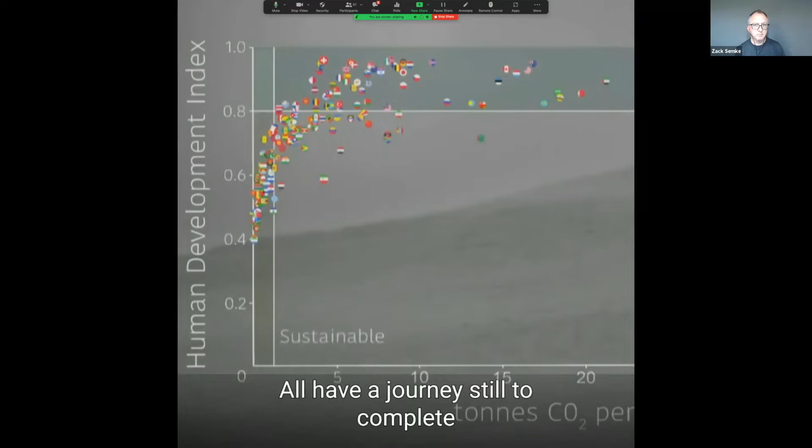A new industrial revolution, powered by millions of sustainable innovations, is essential and is indeed already beginning. We will all share in the benefits: affordable clean energy, healthy air, and enough food to sustain us all. Nature is a key ally. Wherever we restore the wild, it will recapture carbon and help us bring back balance to our planet. And as we work to build a better world, we must acknowledge no nation has completed its development, because no advanced nation is yet sustainable. All have a journey still to complete, so that all nations have a good standard of living and a modest footprint. We're going to have to learn together how to achieve this, ensuring none are left behind. We must use this opportunity to create a more equal world, and our motivation should not be fear, but hope.

Can we fix the climate problem in one generation? My answer would be yes, we have to. We need to not just talk about what we can do, but to do what we can. This is a challenge that we should try to solve in a quick way with a long-term vision. It comes down to this: the people alive now and the generation to come will look at this conference and consider one thing: did that number stop rising and start to drop as a result of commitments made here? There's every reason to believe that the answer can be yes. If working apart we are powerful enough to destabilize our planet, surely working together we are powerful enough to save it. In my lifetime, I've witnessed a terrible decline. In yours, you could and should witness a wonderful recovery. That desperate hope, ladies and gentlemen, delegates, excellency, is why the world is looking to you and why you are here. Thank you.

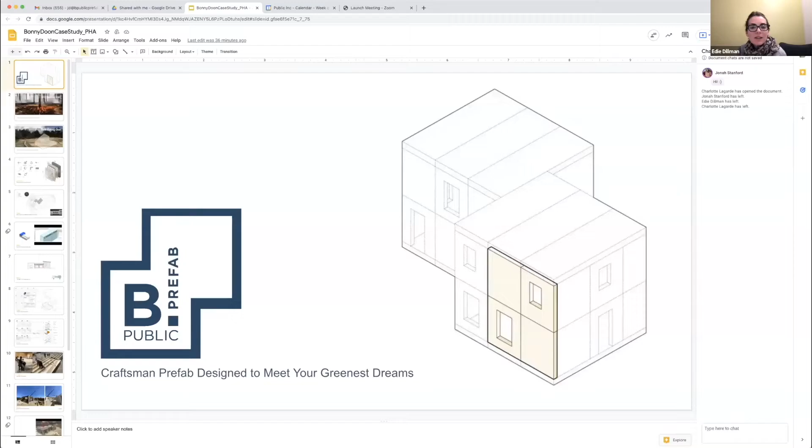There we go. So we're just really delighted to share this and excited for the Q&A. It's always great to have a conversation about this, and we'd love to jump in. So JD, you can take it away and share your screen. Great, looks great, everyone can see. All right, I'll just pause it here for a second. We have this lovely GIF that scrolls through, so we can all get mesmerized by this for a second.

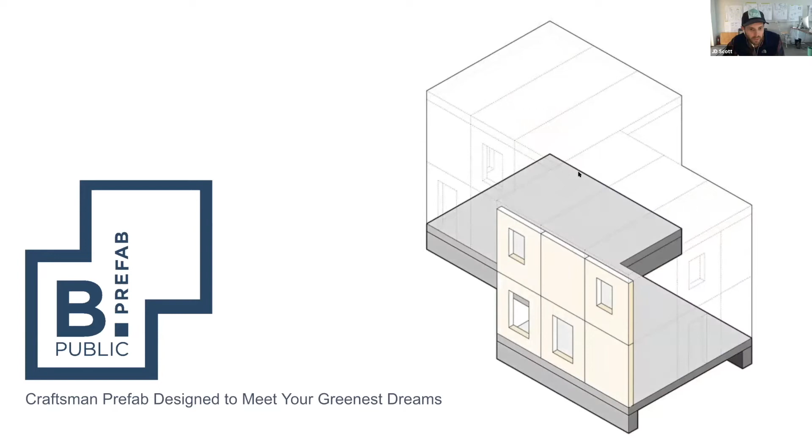Thanks for the introduction, Edie. Just to give you some context on the project and the background.

This is a rebuild from the CZU fire, which was a major wildfire event back in 2020 in Northern California. Santa Cruz County was really the hardest hit in that event, losing nearly 1,000 single-family homes in the fire.

Our client had lost their home in the event and were really excited to return and rebuild. But this was a really traumatic event for this community, and that's something we all experienced when we were on the ground there in September.

Santa Cruz County has really rigorous pre-clearance requirements for these rebuilds, and so that was on the front end. Our client really had to do a lot of work to even be eligible to do this.

Jonah is going to give an overview of the B.Public system and its attributes too. Thanks, JD. JD's been so much fun to work with on this. Just a note quickly.

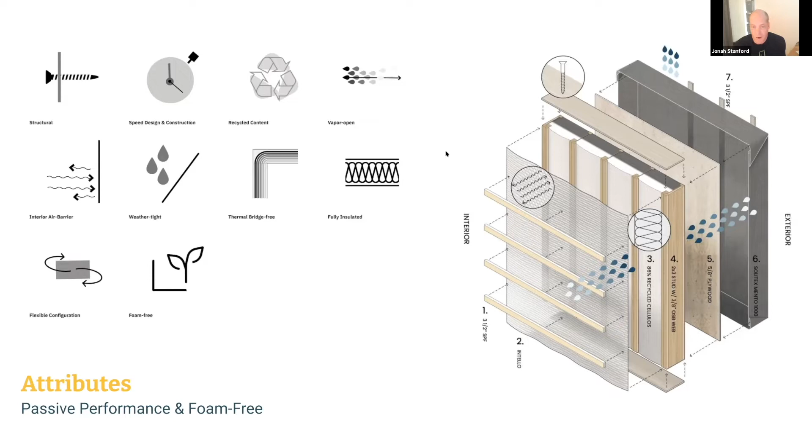The B.Public components, I think maybe most people are familiar with them here, but they are primarily carbon sequestering. They are thermally bridge free, even all their connections. And so it was really great to see JD take on this project with the components and see how they did from a structural and a seismic perspective.

Because really our focus has been to see if we can take those best practices and generate something that was really resilient in terms of its climate, its seismic or structural loads that are always defined per project, and see if it would work within these really diverse situations. So it was a really great project in that way. And I'll just give it back to JD for process there.

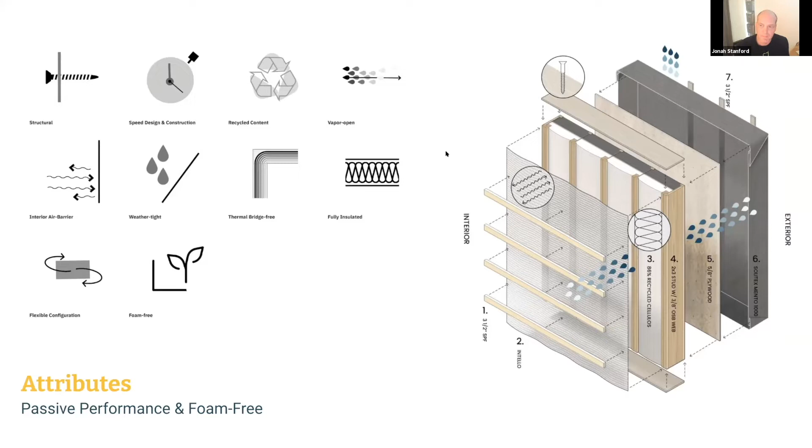We'll have lots of time afterwards for questions to get into more technical detail if people want. Absolutely.

So yeah, moving more into the design process, B.Public, the way we structure our project phases is we start with a site evaluation, site sketch phase, and we also provide a preliminary 3D model at that phase using the components that Jonah just outlined. It's really just to give a client that first vision of what could be done on a site. So in this case, we're showing that dash line where the original building was, and then locating the new house on the site.

Particularly important now for these rebuild projects is having a pretty beefy fire suppression system, so you'll notice the tanks we've located on the site plan. We also look at other site elements they might want to incorporate, like a garden. This project was oriented for a PV array, but it's also on this wonderful axis with a view towards the Pacific Ocean that you can see on clear days.

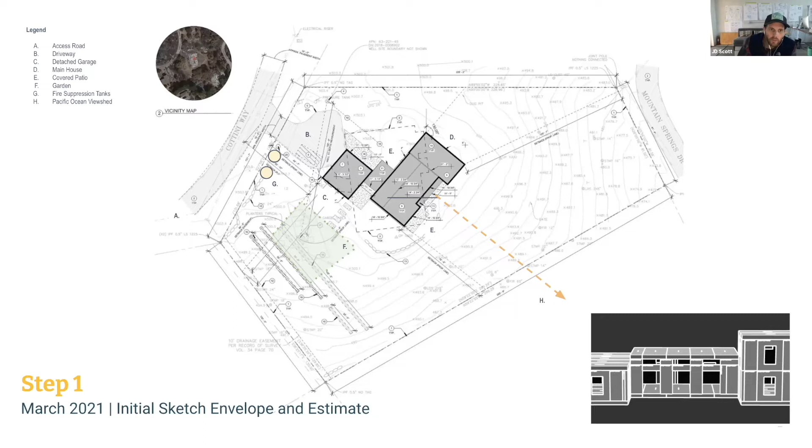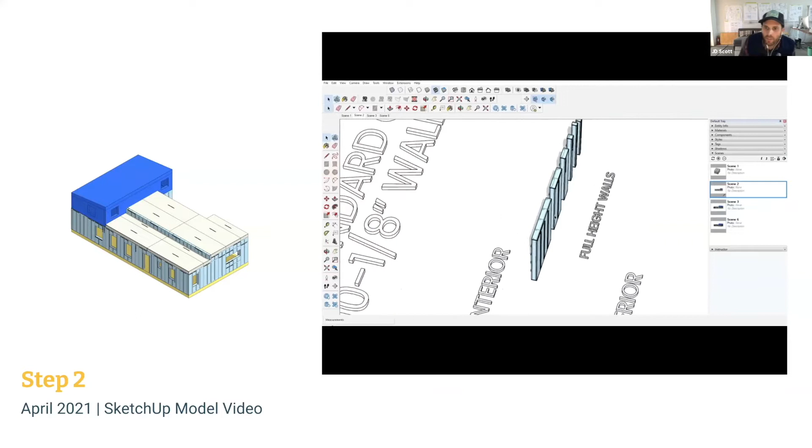The second half of this phase is generating this component model, using our standard panel components which we have in SketchUp. They're available for download for free, so anyone on this call could download these and experiment with them. It's a really intuitive way to design and create a thermal envelope quickly.

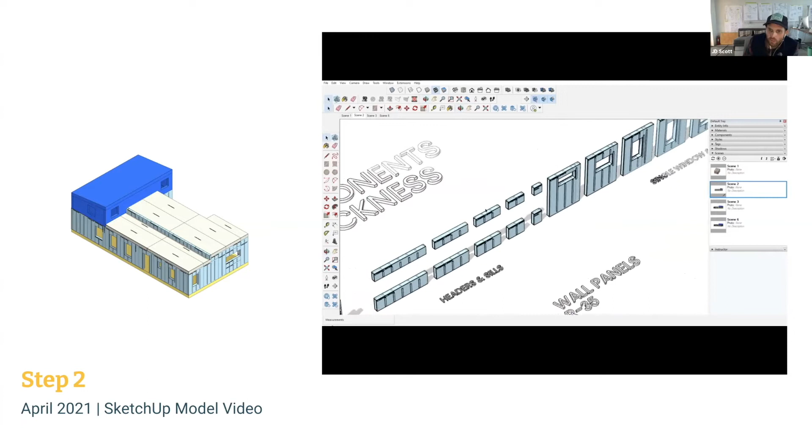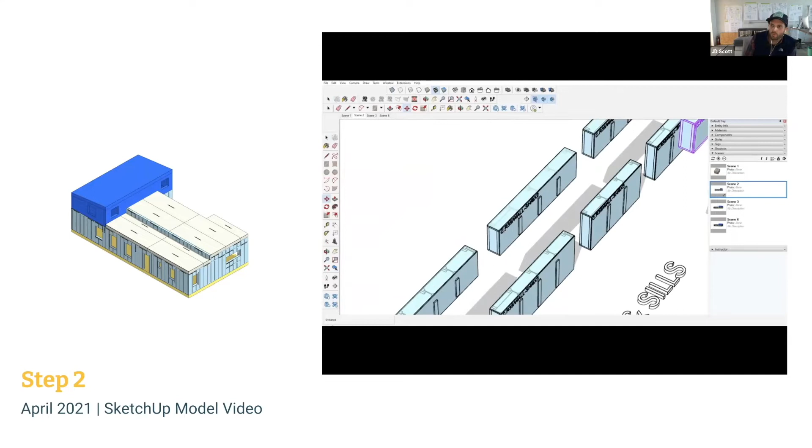This newest generation of SketchUp components are true to life, so they have all the information that our shop drawings would have for the panels. You can see all the structural framing and the interior and exterior furring strips. It gives the client a ton of detailed information up front that, in a normal architectural process, you wouldn't encounter until DD, sometimes later. Accompanying this, we give the client a detailed panel estimate, so they have options up front if they want to look into financing or talk with a builder. They have a lot of leverage coming out of this first phase, just from this panel model.

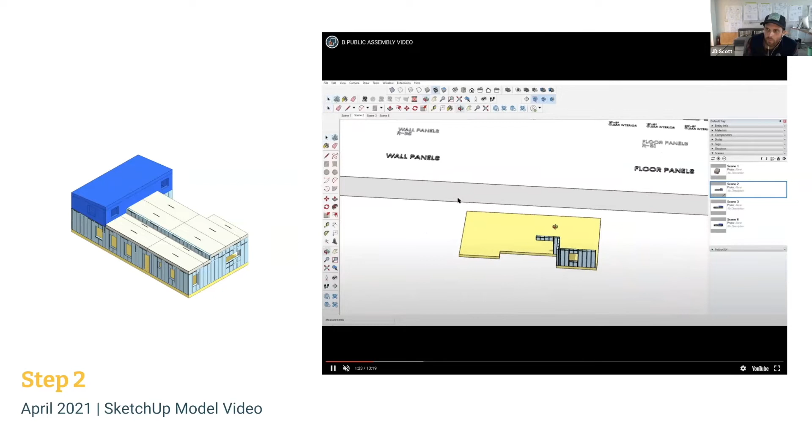Jonah, I don't know if you had anything to add on this. No, I think we can probably go on to the other slide.

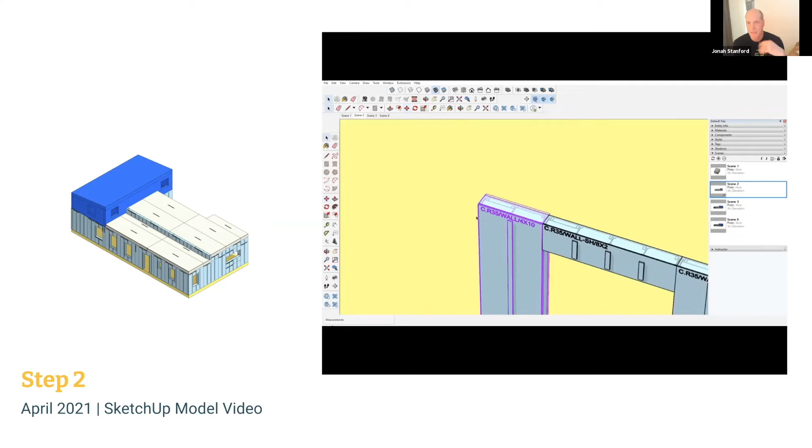During that site plan design, the model building happens really side by side, so that the client has a good estimate for that total thermal envelope construction cost. One thing that JD and I pay attention to is that once you've got your performance nailed down and the cost of it, it's around 35% of your total construction costs, where the remainder is really a tool in terms of finishes and amenities that a project can modulate its budget to. So it's really nice to have that level of cost estimate for the thermal envelope at this point.

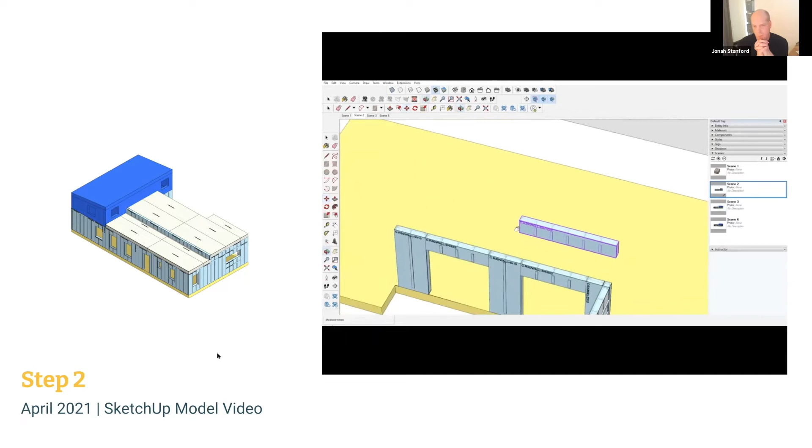Moving into our next phase, we get more into the architectural expression of the project. In this case, we're giving the client different fire-resistant finish options. That being said, we really try to leave these decisions to the client and builder, because our primary focus is really on the system performance and critical items like the panelized assembly, windows and doors, the ventilation system, ERV system. In our builder set, our construction documents, we develop those critical items in an extremely rigorous, detailed way. But we let the fun decision-making fall onto the client and builder, which opens up some more flexibility for our clients.

A lot of these are done on an iPad. This combination of the aesthetic being defined on an iPad and traced really light, and then the 3D modeling, happens before it goes to a BIM or construction documents. So you have really accurate passive house detailing, like building science and thermal bridge understanding, plus a fun sketch of what it's going to look like on the outside. It's kind of cool that it really works from both sides.

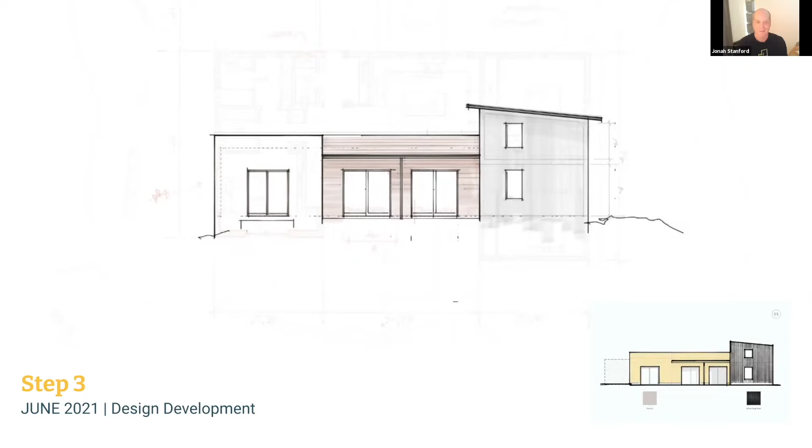So then we move into developing the construction set. One of the ways we're really streamlining this is by developing a standard library of our details - our panel connection details, and also site-built details. These are vetted ahead of time, and we're able to run them by the engineer of record and develop them on a project by project basis.

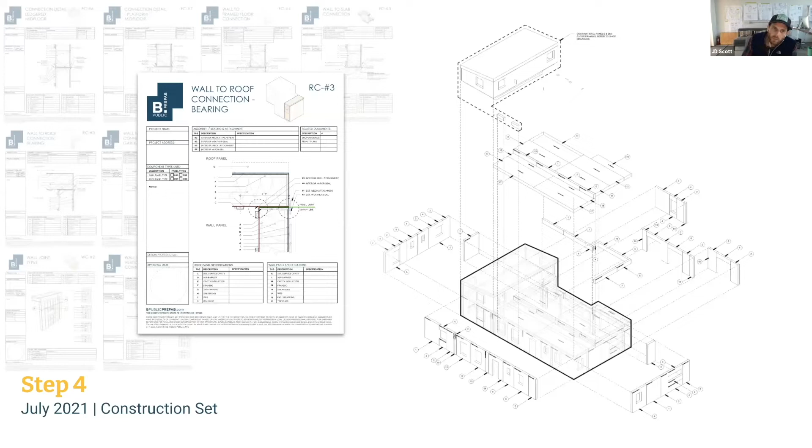At the same time, we're thinking ahead towards the actual panel install. This image on the right was included in the construction document set as an aid to our install crew, when they were on the ground installing the project.

I think it helps more as we're partnering with other architects where we're not the architect of record. It helps communicate to them how that scope is divided up and what those responsibilities are. For those lucky enough to work on full modular or multiple family projects, this becomes less critical because coordination happens in-house. But B.Public is really working to serve smaller or more rural projects that don't have access to full modular construction at that scale, so we're working on ways to clearly integrate with local architects and builders, serving smaller projects just as efficiently as larger multi-family projects using offsite construction.

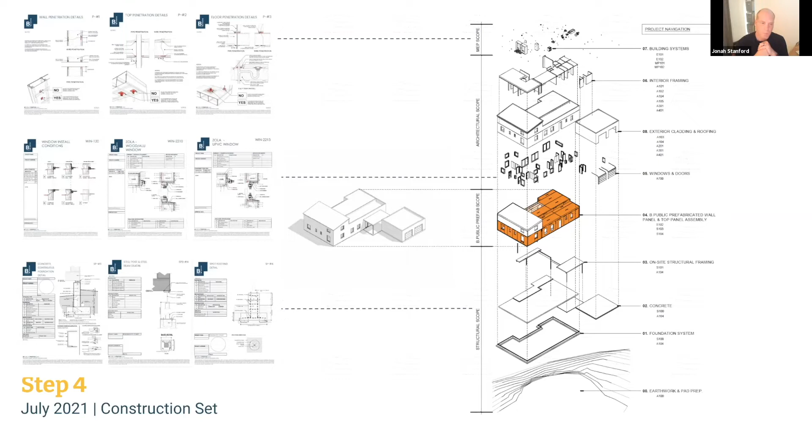Once the building permit is issued, we can start with panel fabrication, maybe a little bit before the permit is issued. Ideally, yes, we could start with panel fabrication.

So these are some images of the panels being constructed in the shop. I do want to jump in here quickly - components were being manufactured, and at the last minute through permitting, one of the consultants for the plan reviewers said we need independent testing on everything. So we had to deal with that. One thing we really learned is how important it is to engage with that jurisdiction very early on, and get everybody on board. Once they understood it, it was totally fine, we were good to go. But there were some funny moments.

Yeah, that's a good point. But these are just images from the shop. I think what's great about the system is that it's constructed very intuitively, using pretty standard tools that all of us are familiar with. So it's not reliant on automation or anything like that, and it's built in a really controlled environment.

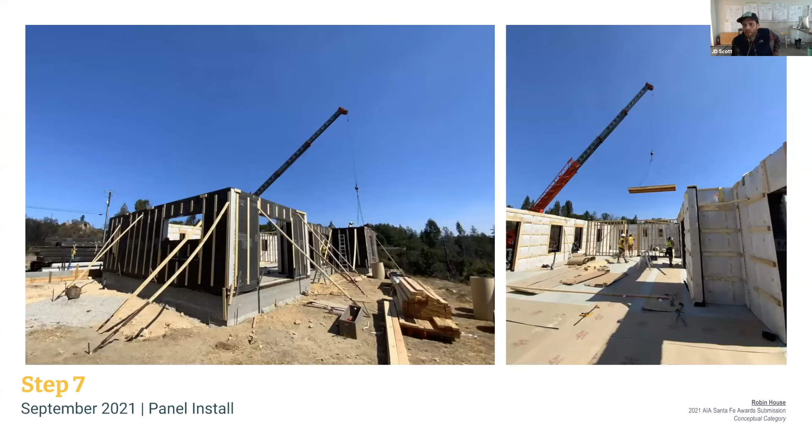Once the panels are complete, they're brought to the job site. These are some images from the first couple of days of this install. I think in total the panel install was less than a week, plus some extra days for air sealing and taping of seams and things like that. This video shows some of that.

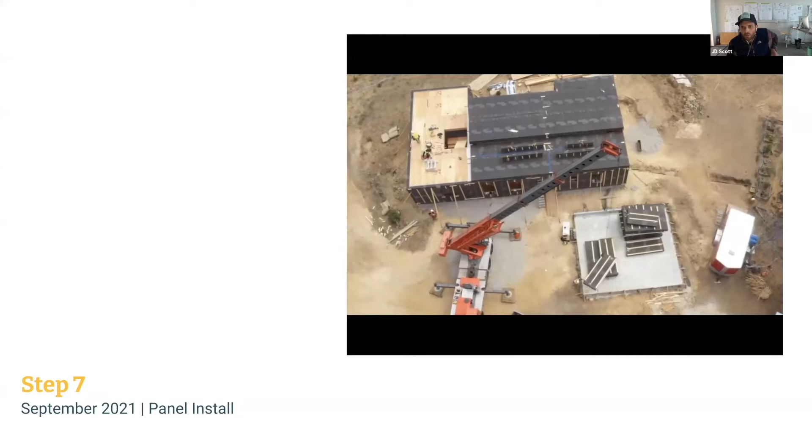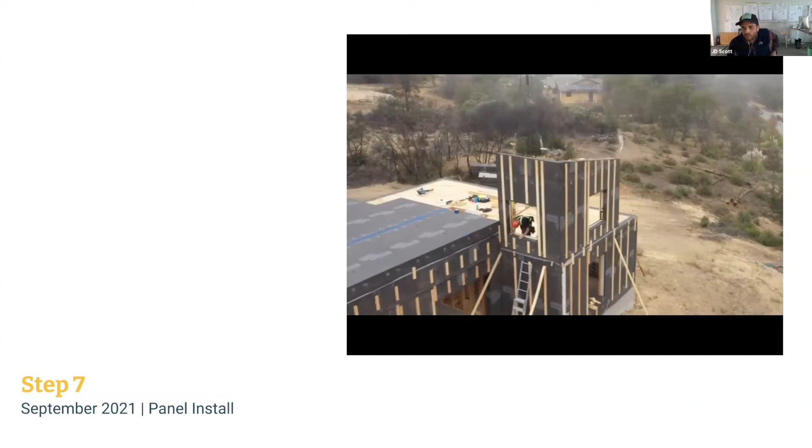I think another hallmark of the system is that the install crew is pretty small - I think this was done with a crew of 4 or 5 and a crane, and that's it. It was really exciting for all of us to see the system tested and implemented this way and this quickly. I don't know if you all had other thoughts on the install.

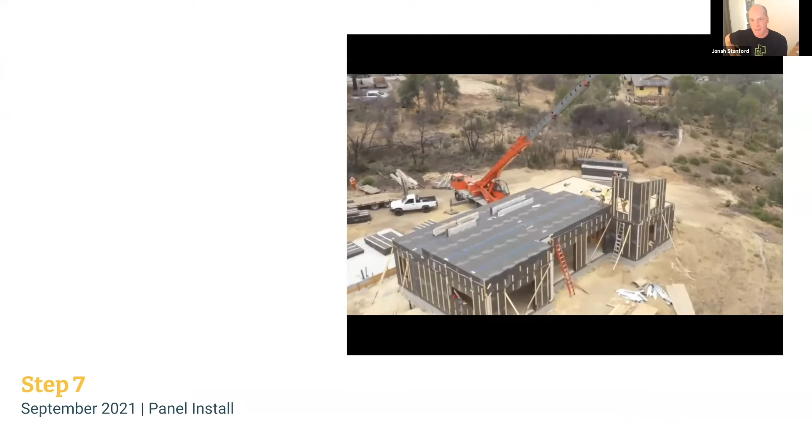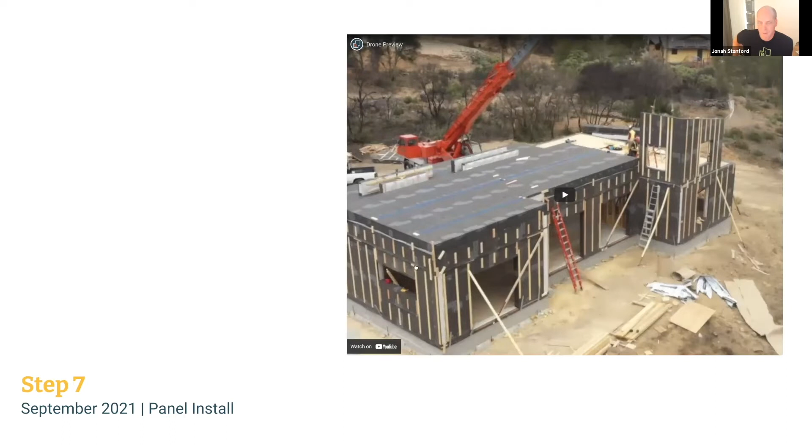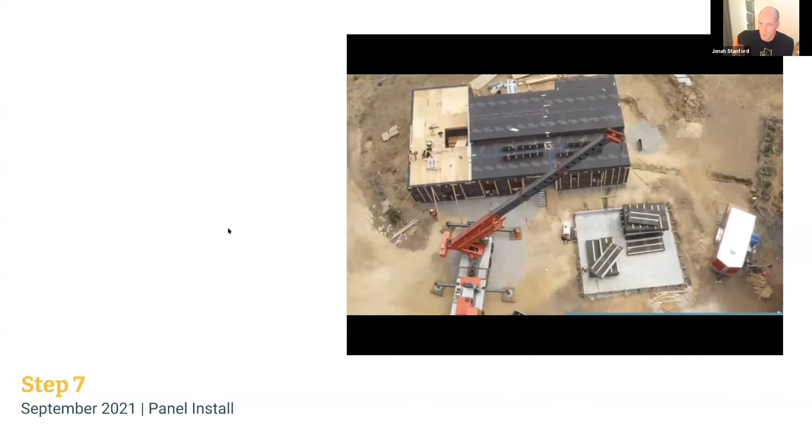No, I just think one of the hallmarks of the B.Public assemblies you can see is the organization or sequencing of loading and unloading the panels. I wasn't there at the very beginning of this project, but came in after the walls were all set. Just being able to have all your components stacked in one place, with roofs that are identical and not 100% project specific, can really ease this portion for mobilization and offloading.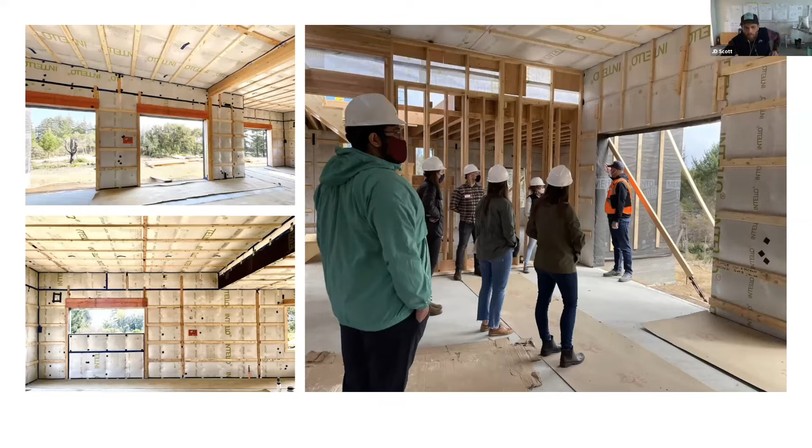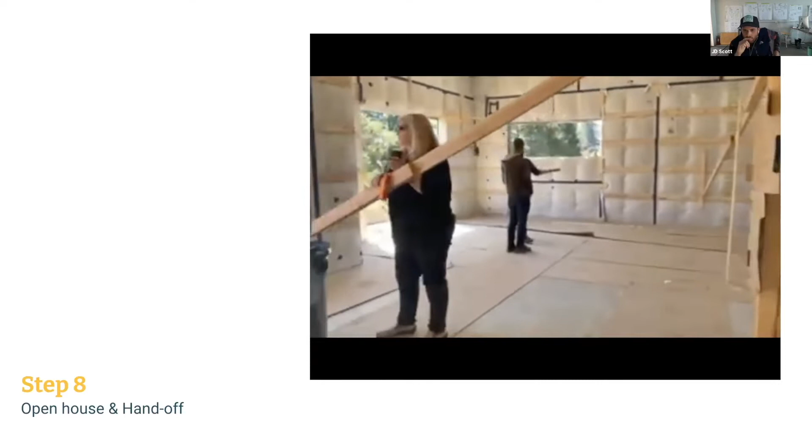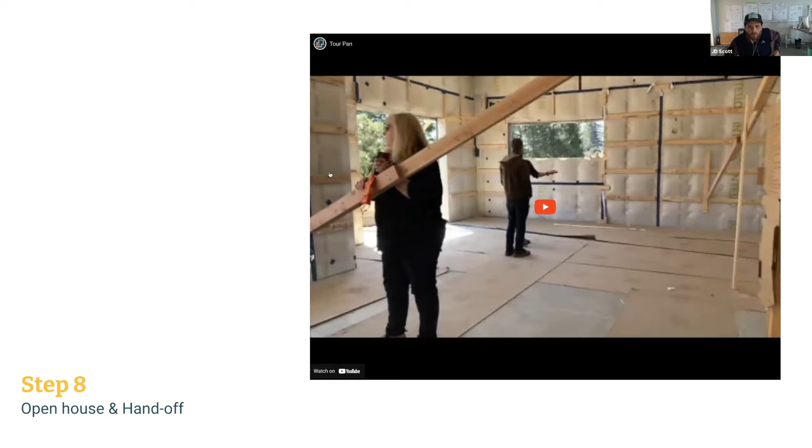Just another quick video from one of the open houses we had on the project. It generated, I feel like I talked to dozens of people when I was out there, a lot of interest and excitement.

I think that's it. Feel free, other B.Public folks, to chime in if we need to backtrack or if you wanted to add to that, but I think that's it.

That was fantastic, you guys. It's really fun to share it and to have you guys walk through it. It's a nice place to end on that slide or the video of the open houses.

We did 2 public or semi-public events, and on the Thursday evening the event went from about 3 to 6, with a lot of neighbors but also a lot of builders. As you can imagine, in a rebuild neighborhood there are a lot of pickup trucks, a lot of activity. A lot of grateful neighbors who didn't lose their homes were really happy to celebrate with their neighbors. Especially on this street it's very random - 2 houses totally gone and then 3 still standing. So to gather with the neighbors was pretty incredible.

This evening is a continuation of those open houses, taking the opportunity to pause and walk through the building and talk about, especially in this community, what are the learnings, what are we changing, what are we taking the opportunity with to make it better. But also calling other folks into this conversation and sharing what's going on in building science, moving to carbon sequestering and speed, getting people informed, either very casually or really doing long tech walkthroughs with the team. So thanks.

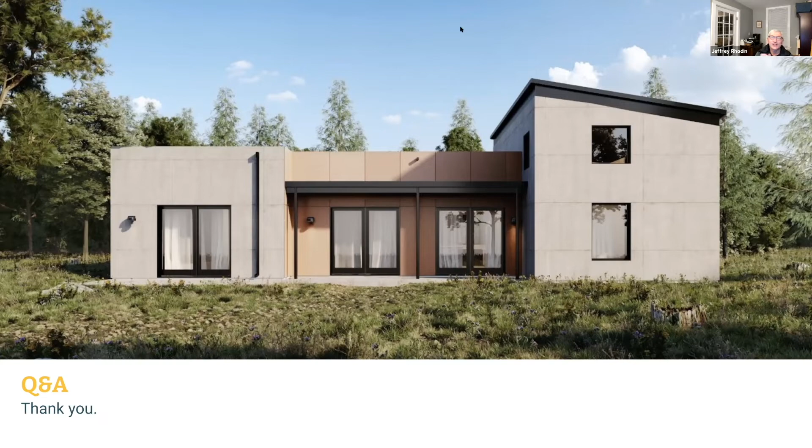Okay, so this is fabulous. I have a quick question. Who does the actual fabrication of the panels? And are there list prices or price estimates per panel that you can use that integrate right in with the budgeting process? Because my impression is that all the panel modeling you showed was done during schematic design, and not during detailed design or construction drawings, which I think is fabulous. So that's the question.

Do you want me to take a stab at that on portions of it, Edie, and you can do the rest? So Jeffrey, there is unit pricing for each one of the components, and that's what allows us to provide consistent pricing for the components themselves. There's still the install portion of it, which—because of the nature of the optimization of the components—can only be done to a certain point. There are structural requirements needed; every project is different, so connections as well as different configurations require internal beams as opposed to a slab on grade, as opposed to a post and beam. So there are always site aspects that'll impact that cost, but B.Public can tell you what the component costs off the shelf. So that's one sort of answer for the object itself.